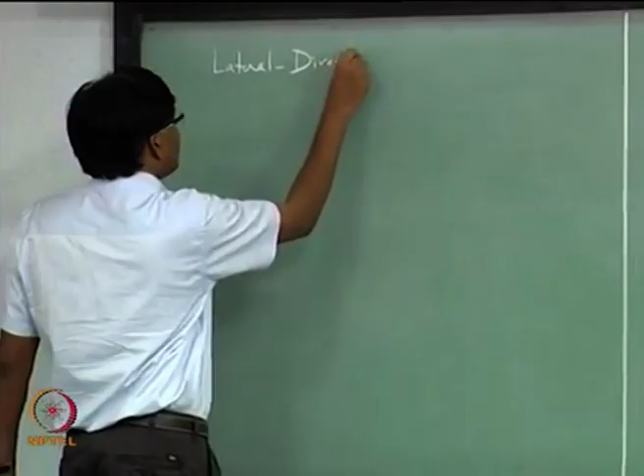Okay, so we will start a new topic now, and that's lateral directional static stability.

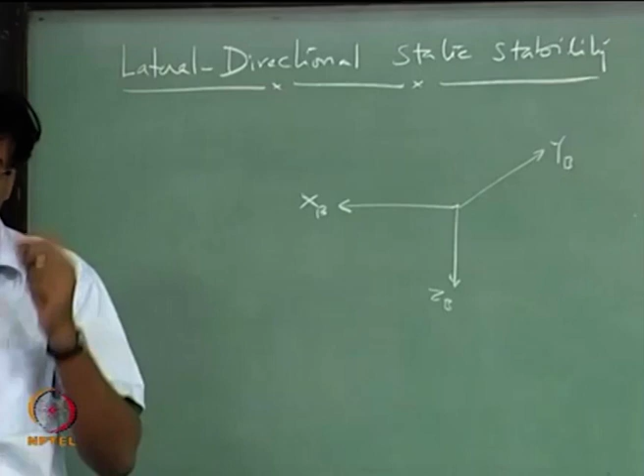So far we have been talking about stability of airplane in the longitudinal plane, that is the XZ plane. In this plane, XB ZB body fixed coordinates - XB ZB is the longitudinal plane, and we have been looking at stability and control only in this plane so far.

There we were looking at what happens to aircraft when aircraft is disturbed by an angle of attack, a small change in angle of attack. First thing is what is the effect of that on the airplane and how airplane is trying to adjust to this. So stability is defined by the stiffness that aircraft will automatically possess

in order to kill this disturbance. So we said the aircraft is flying level flight condition, u naught, and there is no other velocity. This u naught is going right straight.

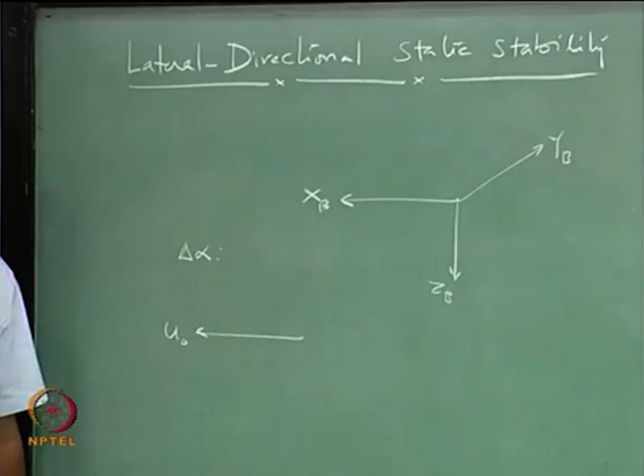What happens when there is a change in angle of attack or there is a gust coming from downward? Aircraft angle of attack is changed, and that means now this XB axis of the aircraft makes an angle delta alpha. We are only talking about very small angles from the equilibrium condition. So this is like a positive moment. The aircraft is having an angle of attack delta alpha now, which is positive because of this gust coming from

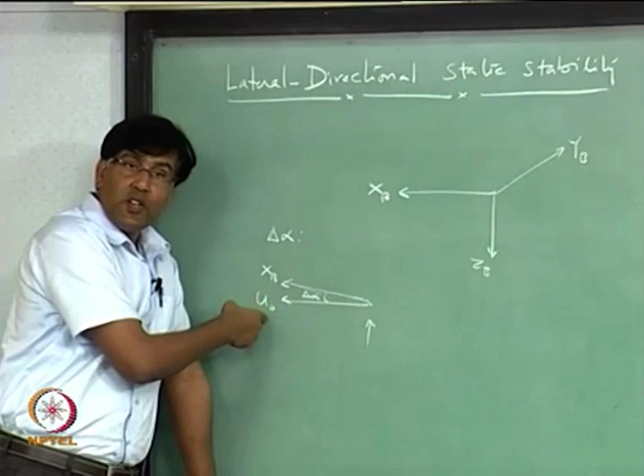downward, but still flying this u naught. Remember that this delta alpha is only a small disturbance which is caused by this gust, and result of that is to create a positive pitching moment about the CG. And when I said the aircraft is stable in pitch, what it means is aircraft automatically will try to kill this delta alpha, isn't it.

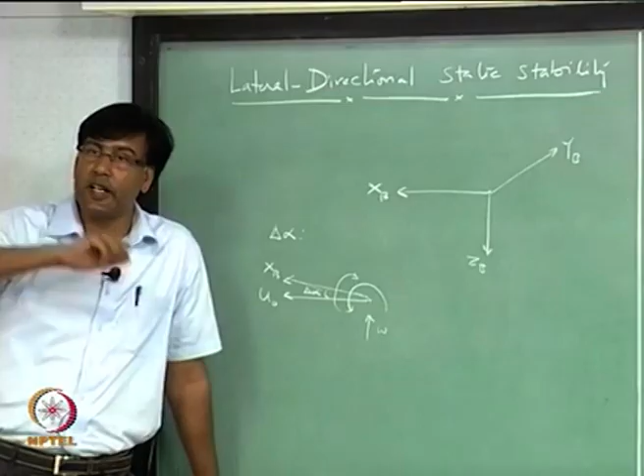So aircraft is actually, whenever it sees that there is a change in delta alpha because of the disturbance, is trying to generate a moment in the opposite direction so that it kills the delta alpha, and that is when we say that the aircraft is statically stable in pitch. So it is basically trying to kill the disturbance.

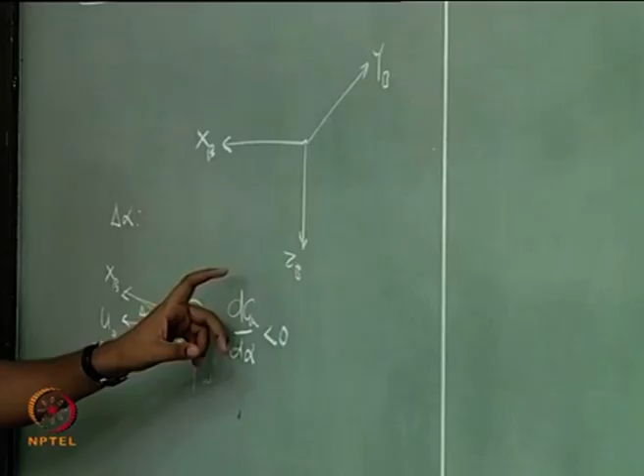And that is where we define this derivative - so positive increase in angle of attack should automatically follow or be followed by a negative pitching moment.

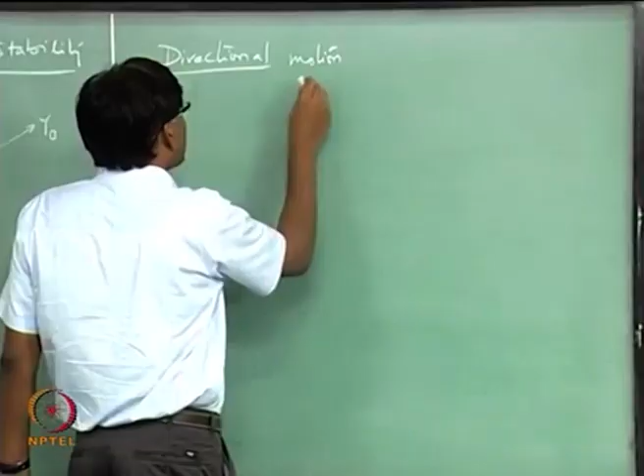Now let us look at what happens in other planes. So there are two motions which we are going to see now. One is directional, and that is in this XB YB plane. So motion about the Z axis, or directional stability,

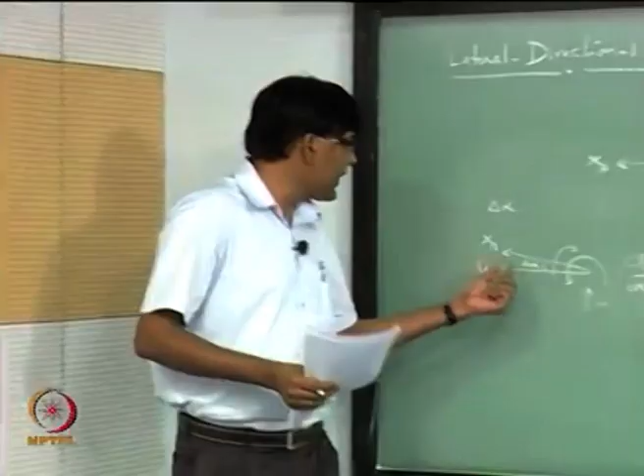and what is the angle associated with the wind in this plane? So far we have been looking at stability with respect to this angle of attack, this angle which is angle of attack. Which is the other angle associated with the wind? See, wind may be coming from any direction, may not be coming only in the longitudinal plane, it can come from any direction, span wise, but what is the angle associated with that?

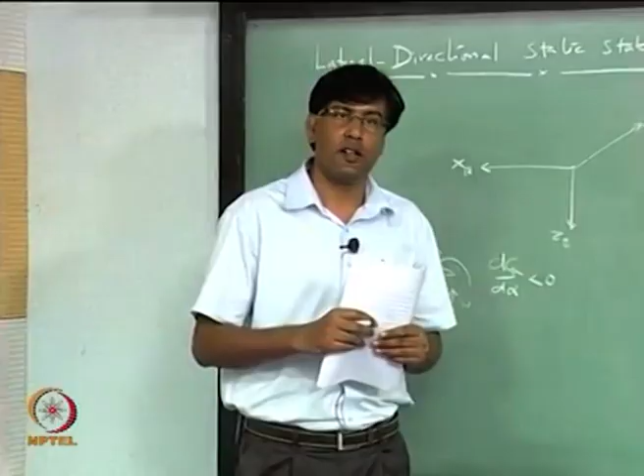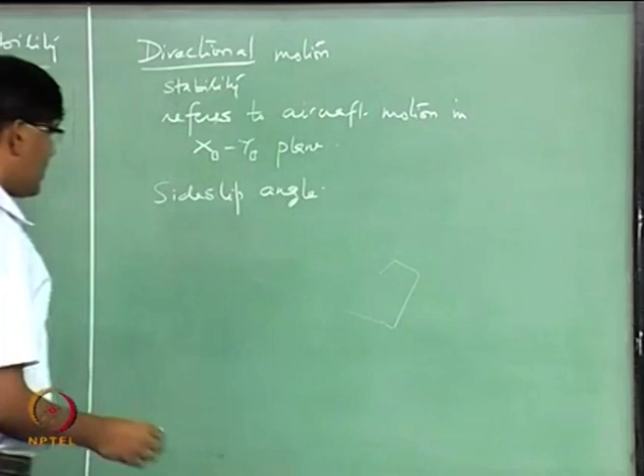Side slip. So if you want to see what this angle is in 3 dimensions, let me draw one picture for you and also draw

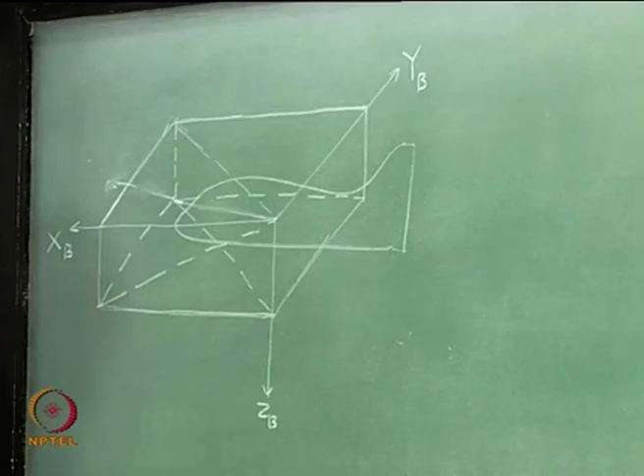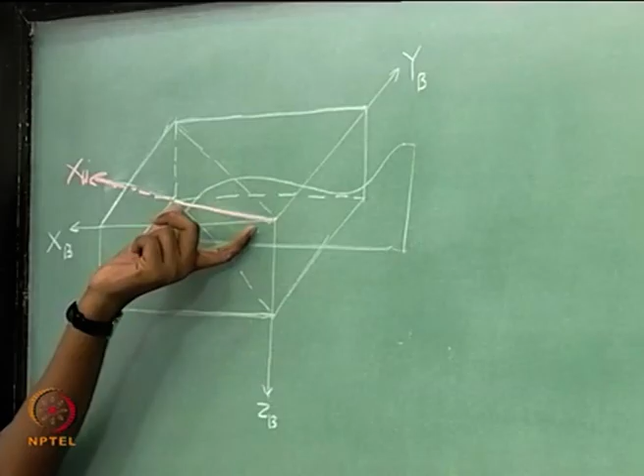So, this could be probably your velocity vector. How many angles does it involve? Now, if you want to bring it to this axis system, or wind axis, we want to find out the components along the body fixed axis system. How many angles are involved? One angle is side slip and the other is angle of attack.

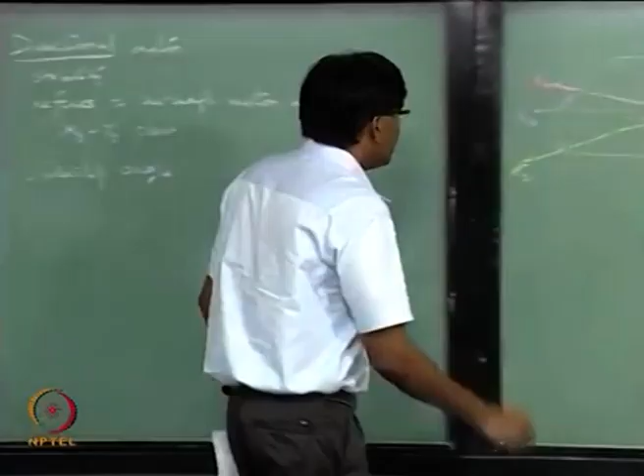So, let us try to define those angles. Beta angle is actually the angle between this wind and the X axis - that is the direction of the velocity vector. So, your aircraft can actually be going doing this. If it is side slipping and also with some angle of attack, then it would be going something like this. So, this angle is called the side slip angle.

You see that? I am joining these two vertices and drawing a line through that. So, diagonal, and that is the direction of the velocity vector, and wind is relative wind. So, if I am going like this, the wind is coming onto me in the same direction, the opposite direction actually. So, this is the angle beta.

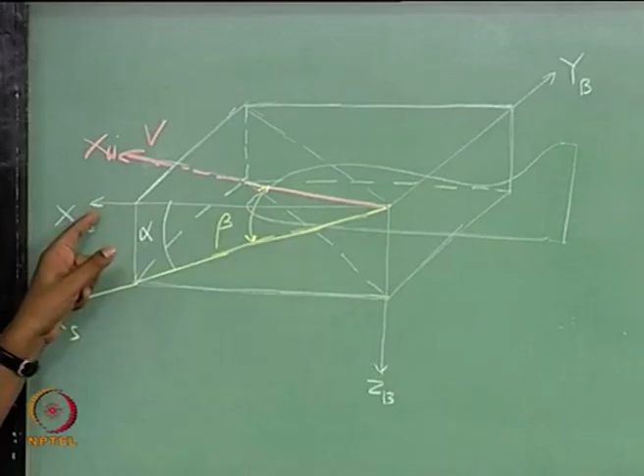What is alpha? Alpha is this. So, now I am taking a component of this vector, velocity vector, on the longitudinal plane. That vector makes an angle with this body fixed axis, and that is the angle of attack. And when we said that we are only going to look at the longitudinal plane, we neglected that part. So, that is how you defined your angle of attack - this is the direction of your velocity in the longitudinal plane and the angle that it makes with the

body fixed X axis. So, now if I am talking about this XB YB plane, I am actually assuming that alpha has become 0, and then you are in this XB YB plane, and I am talking about stability only in that plane.

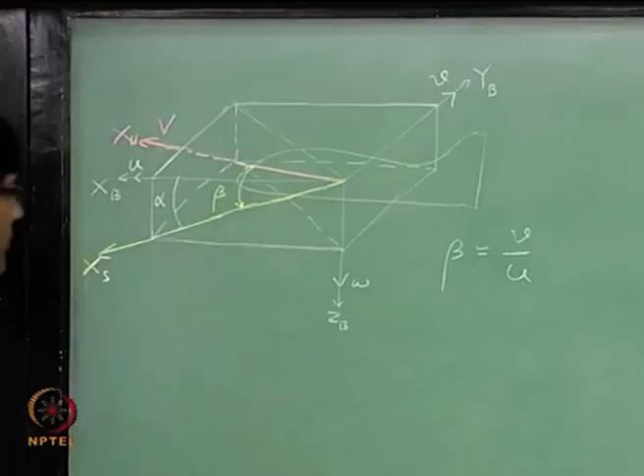So, let us see what we are trying to do here. And this beta is positive. Is it all right?

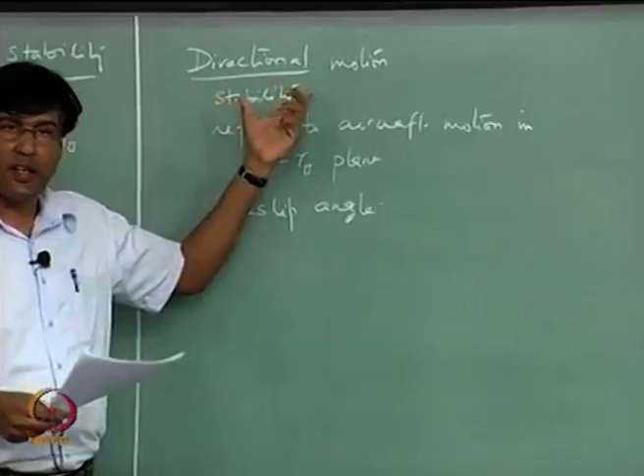So, now we are looking at directional stability, and the stability is related with motion only in the directional, or xb yb plane, and this stability is related to the change in the side slip angle. So now we have to talk about derivatives with respect to this side slip angle.

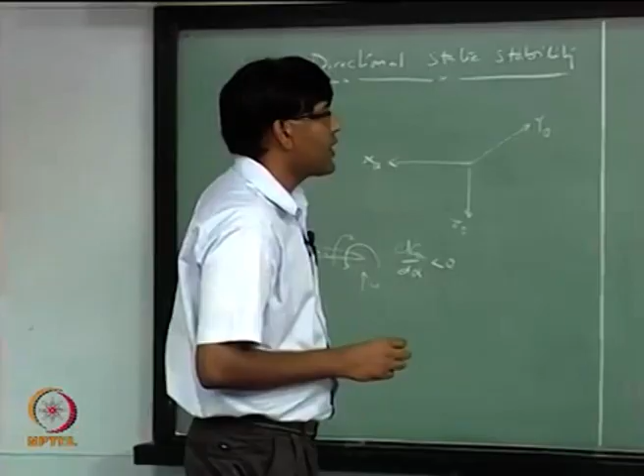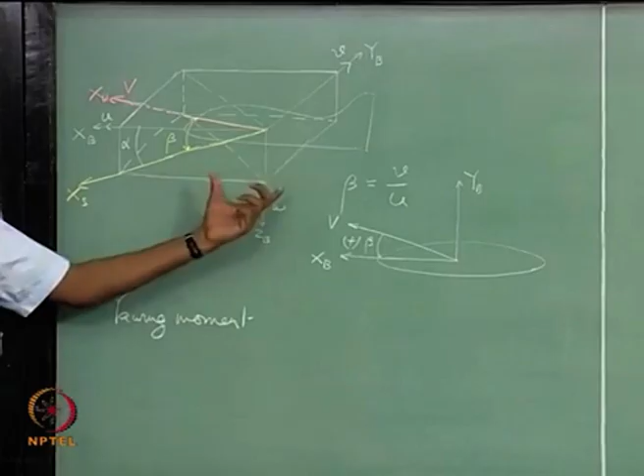Similar to this condition, there is a condition also on the moment in the xb yb plane about the z axis. What is that moment called? Moment about the z axis, yawing moment. And I want to look at what happens to this moment with respect to the side slip angle, and that will define the directional stability. So this is the derivative that I want to look at.

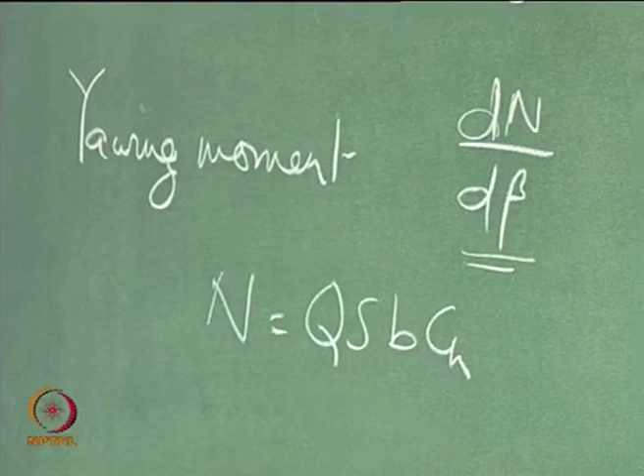If I want to write it in non-dimensional form, then you can use the yawing moment coefficient. This is how the yawing moment is written. Q is the dynamic pressure, S is the reference area, which is the wing planform area, B is the wing span, and Cn is the yawing moment coefficient.

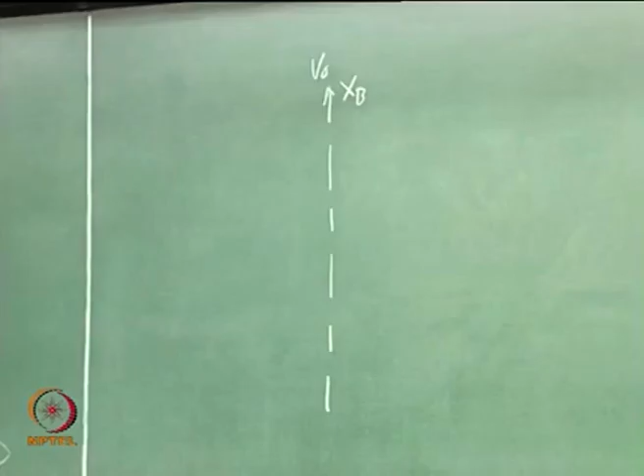We want to find out what is happening to this yawing moment when there is a small change in side slip angle, and this change is really small. So you have to remember that we are flying a level condition. Now I am looking at what is happening only in this xb yb plane, so we are neglecting that motion in the third direction.

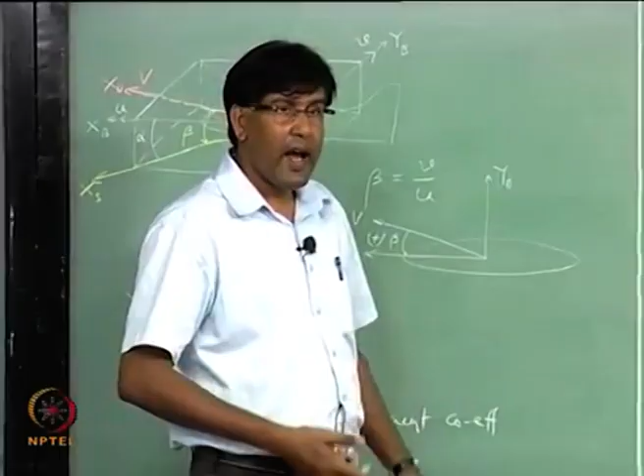So you are flying like this. Now there is a velocity coming from the side, that is like a disturbance, and that will have a tendency to introduce a beta. This is how the beta is defined. So as soon as you see this, there is a beta introduced, so now you are still going with the same velocity in this direction, but there is a beta introduced like this. Is this all right? So you are going like this, and suddenly...

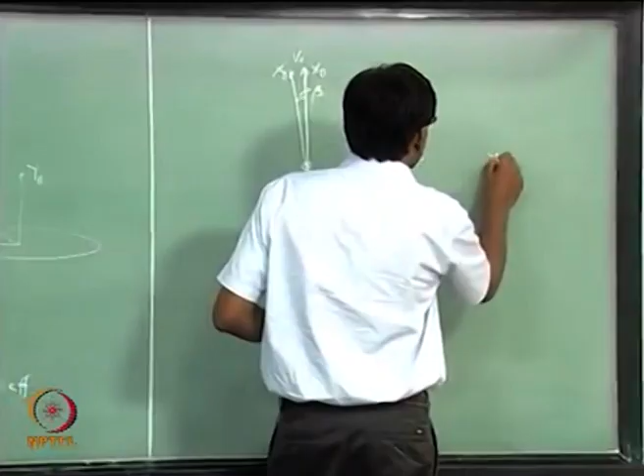your CG looks like it started moving in the other direction. So my xb is this, but I am moving in this direction. Many books will use this kind of notation, but this schematic will be slightly difficult to follow, so that is why I am trying to use this. So you are going straight, and then there is a velocity you see that tries to introduce a moment which is in this direction. That is how the xb axis of the aircraft is not the same as the old one, because of this angle.

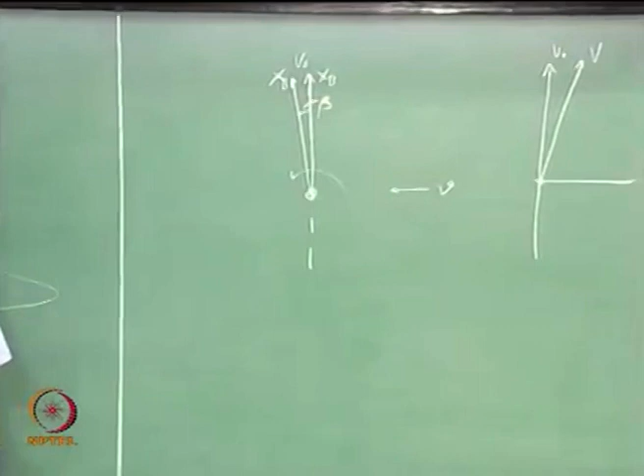So there is a moment, and what is the direction of that moment? Sign of that moment is YB going towards XB, so it is a negative moment. So a negative moment is generated which is trying to introduce this beta, and what does stability property mean? The aircraft should be able to kill that beta. So you have to generate a moment which is in the positive direction, and this restoring force the aircraft has to generate automatically.

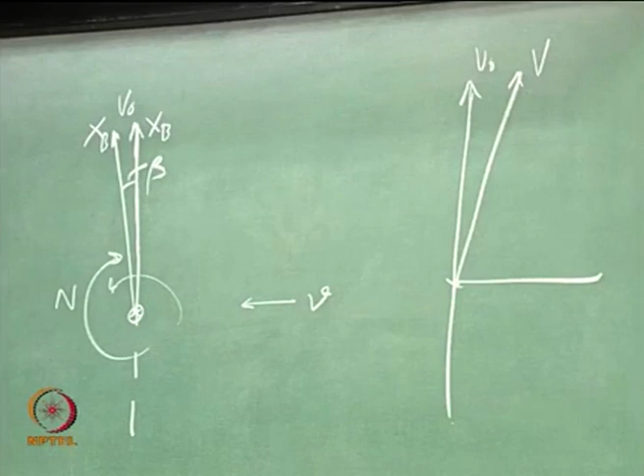This beta is positive, so a positive change in side slip angle has to be followed by a positive change in the yawing moment, that is when you are going to kill that beta. So what should be the condition of stability? This is what has to happen to kill this beta. So every aircraft should possess this property for directional stability. Clear?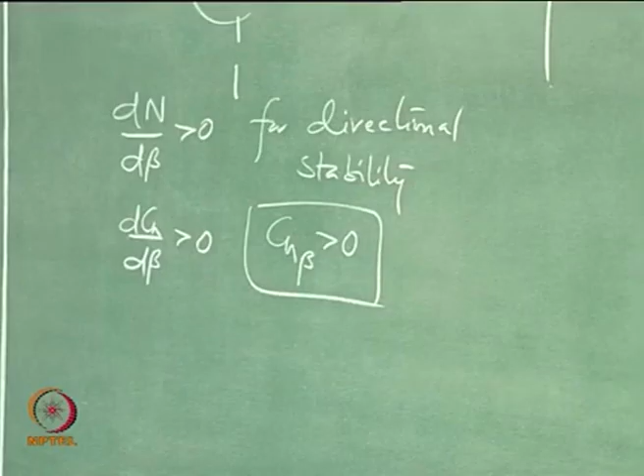Now, if I want to write that derivative in terms of this yawing moment coefficient, then I can also say that, in the short form, it is written as Cn beta. So you have to design your aircraft in such a way that you are satisfying this.

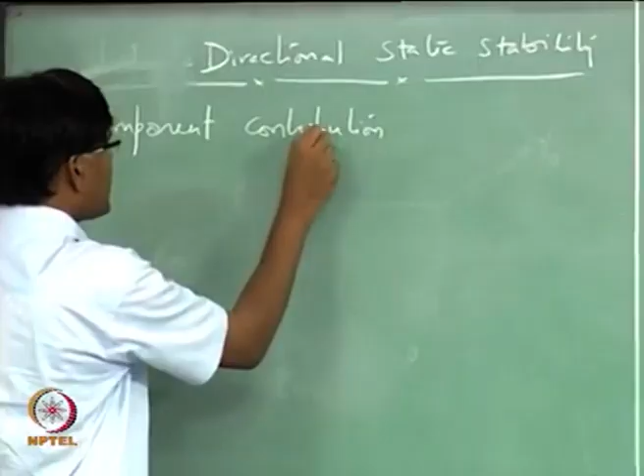Now, similar to Cm alpha, there will be contribution from each component of aircraft to this derivative also. This is for aircraft component contribution to Cn beta. So now we start doing the same exercise what we did for Cm alpha, and let us look at each one of them, one by one.

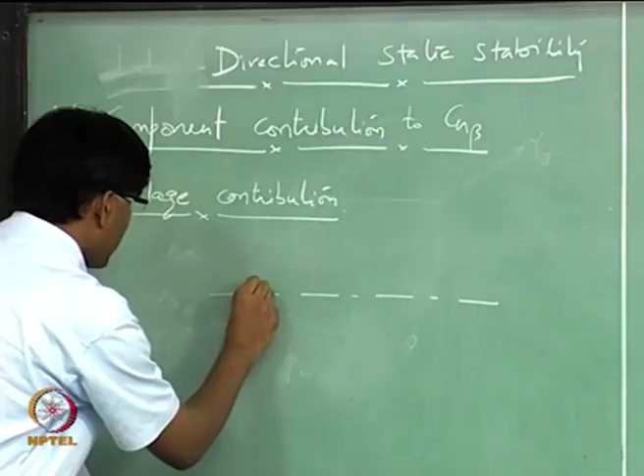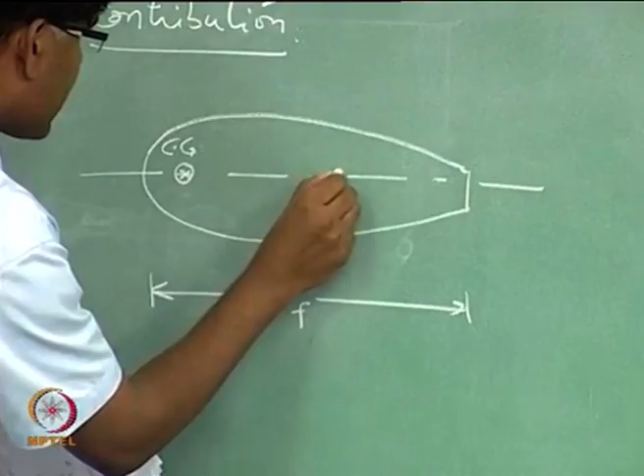Fuselage contribution. Now, let us draw the same picture which I had drawn for Cm alpha, so we have our fuselage looking like this, length of the fuselage is Lf. Let us say CG is located here, which is at a distance - I am looking from the top - let us call this some distance, small lf. So this is the distance between the center of pressure and the center of gravity of the airplane.

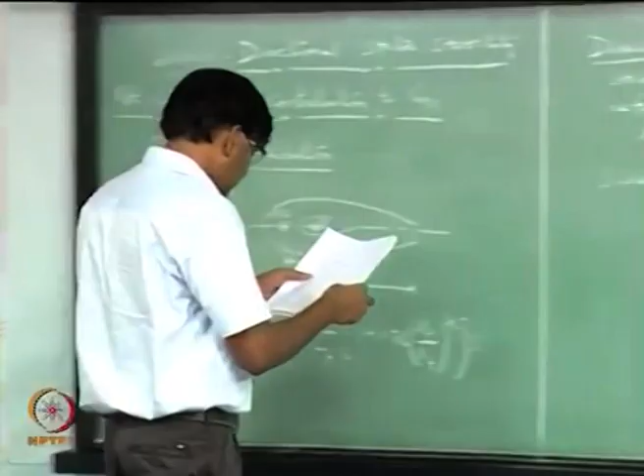This yawing moment coefficient for the fuselage is with respect to the fuselage parameters. If I have to talk about delta Cn for the whole airplane, then I have to take the wing as the reference condition. So if I say contribution to Cn due to fuselage for the whole airplane, then I have to use this as the reference condition.

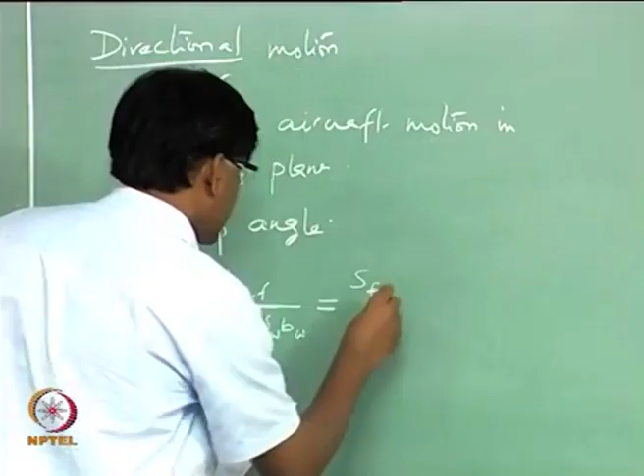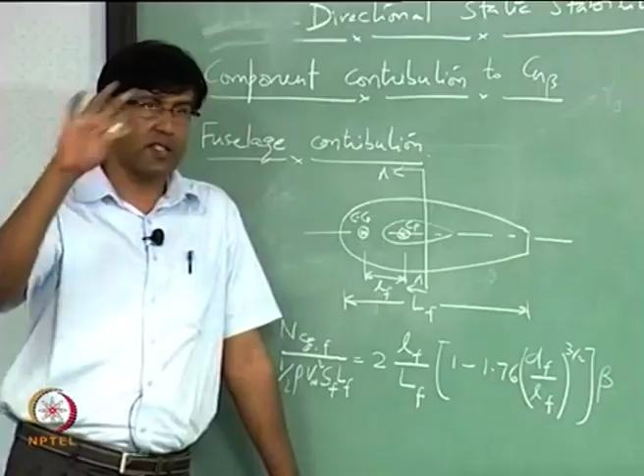What is SF? SF is the maximum frontal area. When you look at this cross section, you have to take the maximum frontal area, whatever you see as the maximum area. Wait a minute, that is not correct. This SF is the projected side area of the fuselage.

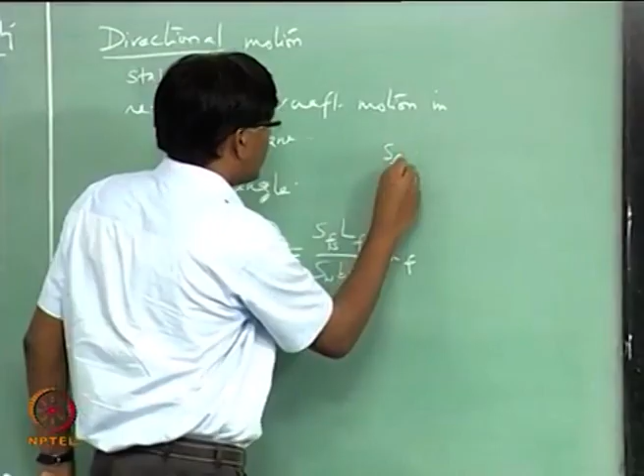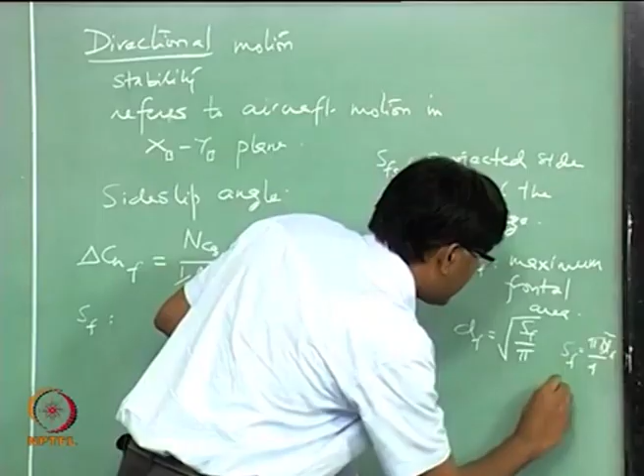And this df is corresponding to the maximum frontal area that you see. So if I say that area is SF, then df is...

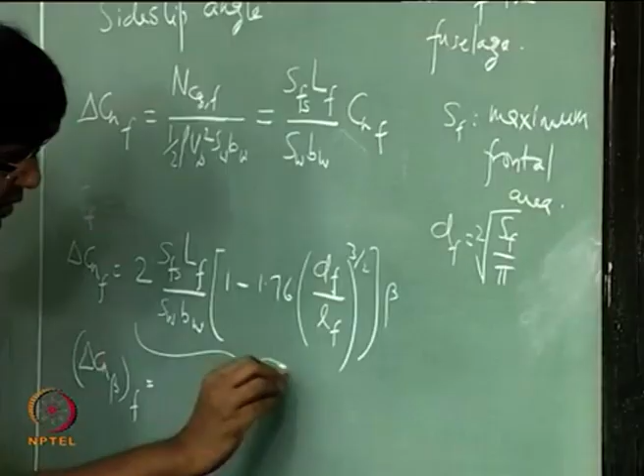So now I have to take the derivative of this quantity with respect to beta, so we get this expression. This expression is again given by Hogue in the 1960s, but there is another relation available in many books, and let us look at that as well. This is for wing fuselage combination.

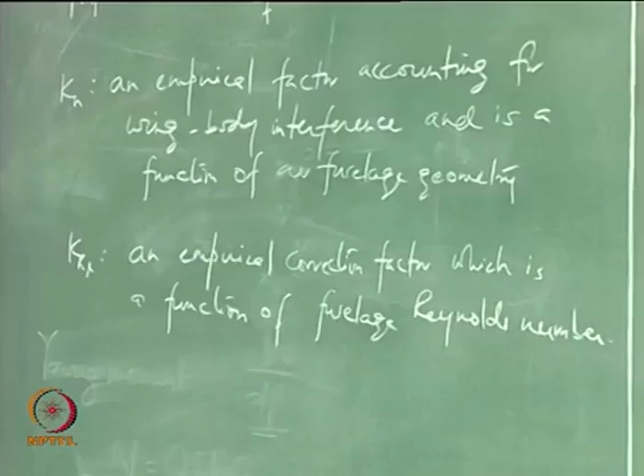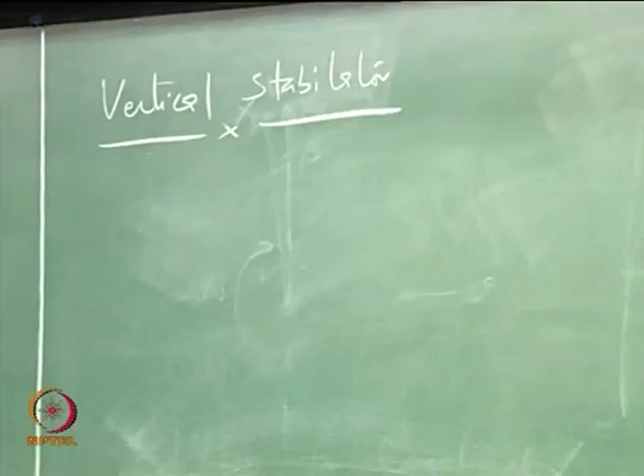What else will contribute to this moment or derivative, Cn beta? Which other component will contribute to this derivative? Vertical tail. Vertical tail is a stabilizer, so vertical stabilizer. By the name itself, it says that the contribution coming from the vertical tail should be positive. So let us try to derive an expression for the contribution coming from the tail.

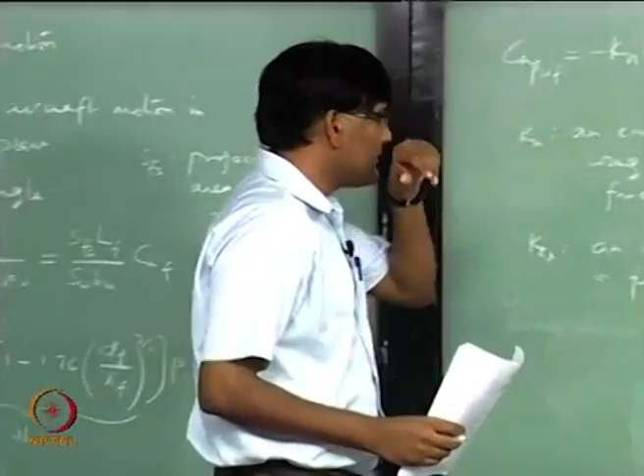So this is your vertical tail, I am looking from the top. This is how wind is coming onto the aircraft now, at side slip angle beta. So tail is definitely lying behind the wing, so it should also accommodate the propeller effect or the effect coming from the trailing edge vortices. And here the effect of the trailing edge vortices on the wing is to increase the angle of attack. So beta is like an angle of attack for this tail.

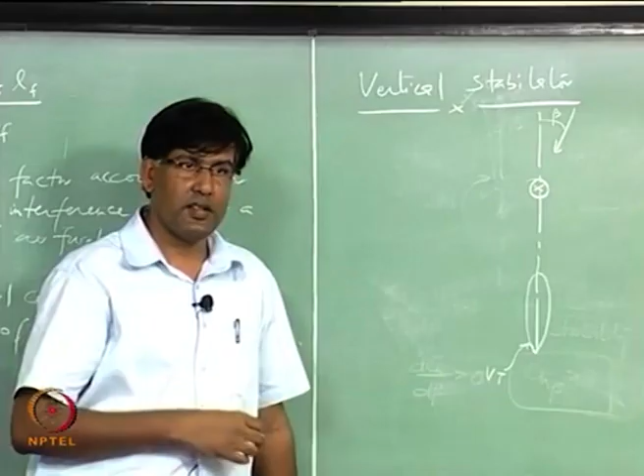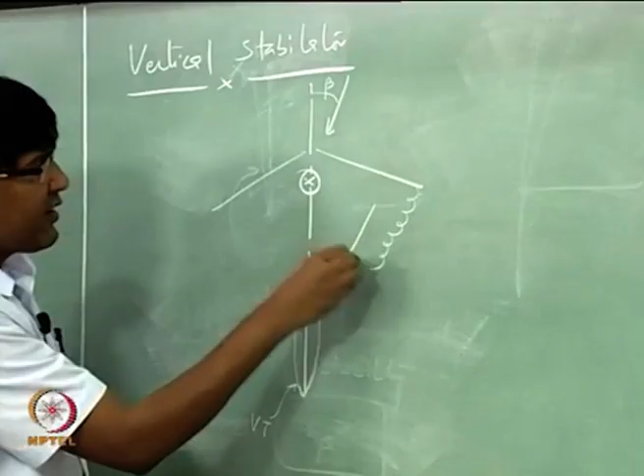So the effect of the trailing edge vortices is to change the angle of attack of this free stream, and that change in angle of attack at the tail is positive. So if there is a beta, the trailing edge vortices will be, if you look at, let us say this is your wing, and you are at some angle beta, you see trailing edge vortices coming like this, and that is going to change the magnitude and also the direction of this velocity vector which the vertical tail is seeing, and in this case it is higher than beta, and the angle which we called earlier downwash here is called sidewash.

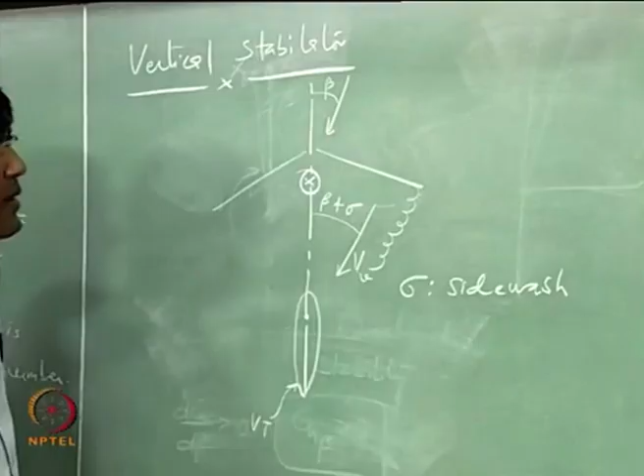And let us say this is the aerodynamic center of the vertical tail. So if this is V, small v is for vertical tail. So it is going to generate a lift at the tail, and how do you quantify that? LV is almost like half rho v square CL.

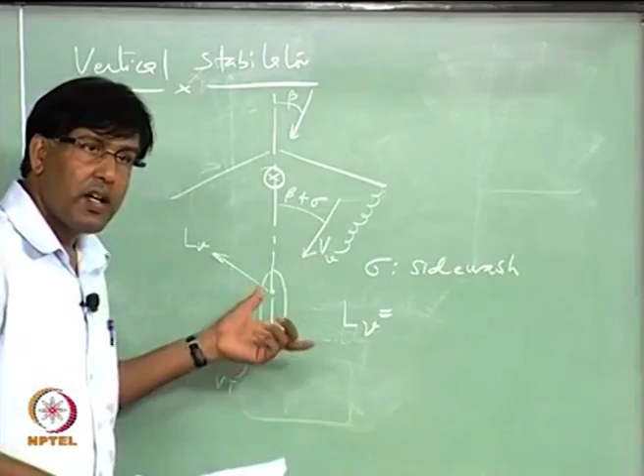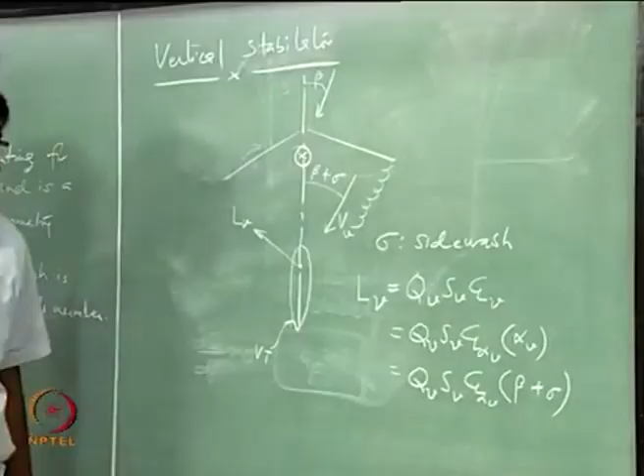It's the same expression, because if you look at the section of the vertical tail, it is an airfoil, and the angle of attack is this beta plus the sidewash angle, the vertical angle of attack at the vertical tail.

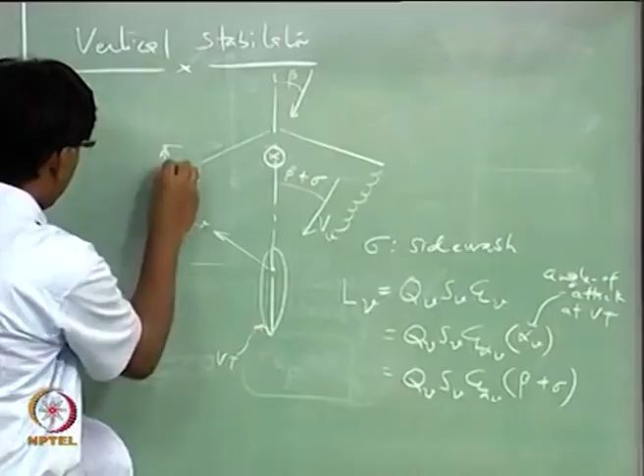But this is not what we want to find out, we want to find out the moment generated by this force. So let us say this distance is LV, so what is the moment generated? Let us also assume that these angles are small, beta is small, beta is a very small angle and the sidewash angle is also small. So I can assume that this LV force is almost perpendicular to this line, and then I have to take the moment of that force about the CG.

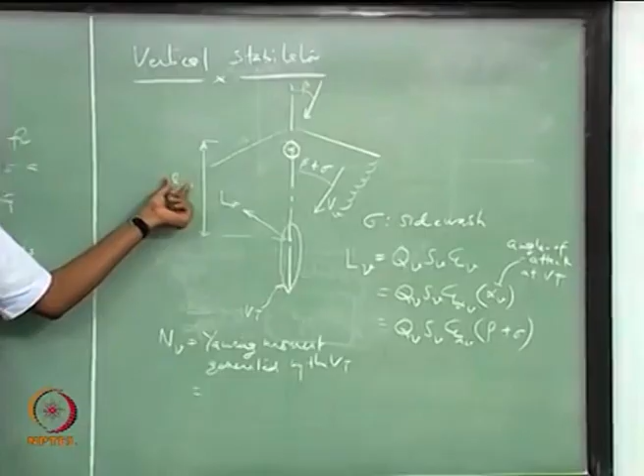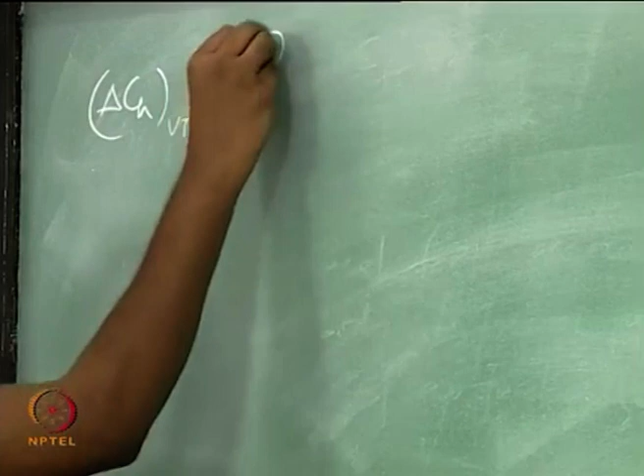So this is roughly LV into this small lv, capital LV into small lv, and what is the direction, what is the sign of this moment? Positive. Now the total contribution to this airplane delta Cn due to vertical tail will be...

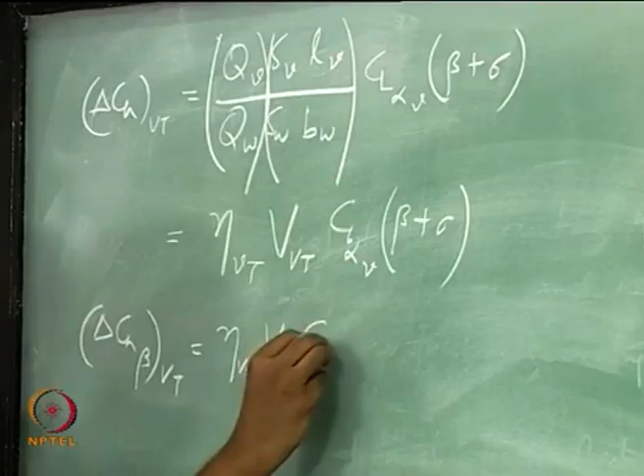This ratio is the ratio of two dynamic pressures, you can call this tail efficiency of the vertical tail. And what is this? Vertical tail volume ratio. What is this quantity? Lift curve slope of the tail.

So vertical tail is supposed to provide stability to the aircraft in this plane, and we are seeing here that that is indeed true. The SV here is the area of the vertical tail including that part which is going inside the fuselage, there will be some portion of the vertical tail which is in the fuselage, so this is the total.

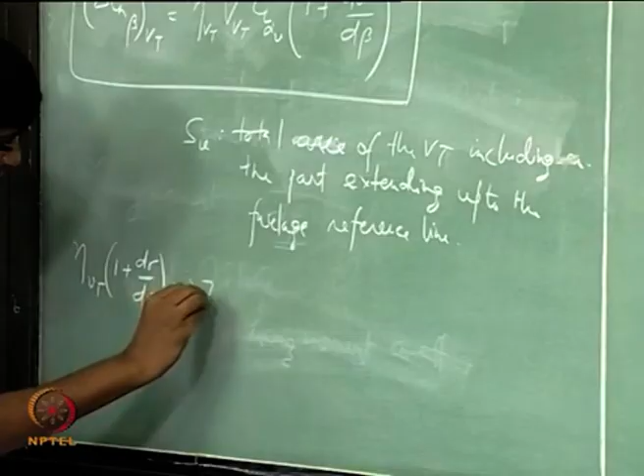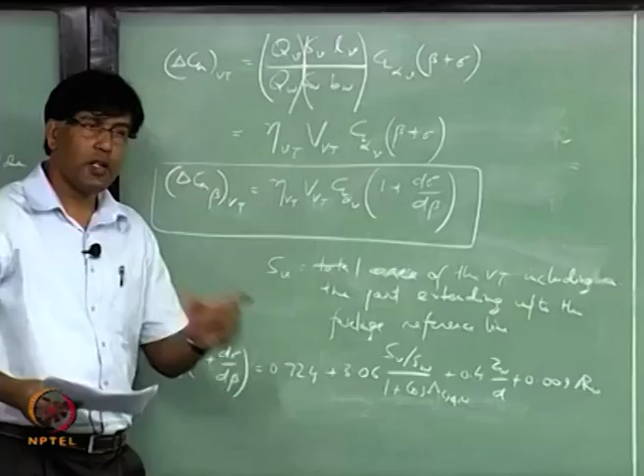There is a relation available for this part. So you know what is the aspect ratio of the wing, SV you know, SW you know, there is the sweep of the quarter chord line on the wing, and ZW.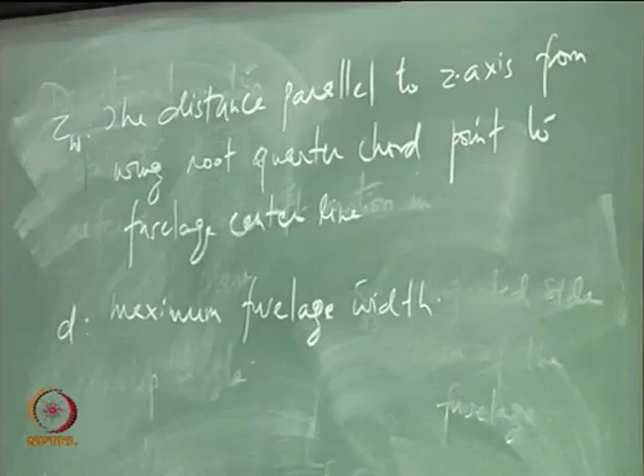Which other component? You have several components on the aircraft, so what else? Nacelle - no, nacelle looks the same as fuselage, so if you want to calculate the contribution of nacelle to the Cn, you can calculate it in the same manner.

What about the wing? Now wing is located in a different fashion on the airplane, it is located on the top, in the middle, or at the bottom of the fuselage, and how else? Some wings have wing sweep, some wings have some elevation like this, or going down - dihedral, anhedral. So all those effects we have to see, we will look at all those effects in the next class.